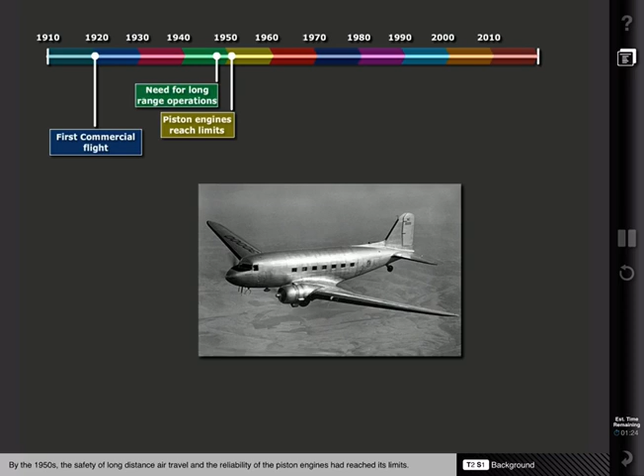By the 1950s, the safety of long-distance air travel and the reliability of piston engines had reached its limits. In 1953, regulations came out requiring commercial airlines operating twin-engine aircraft to stay within 60 minutes flying time of a suitable airport at all times. This drastically restricted where and how an airline could conduct its flight operations.

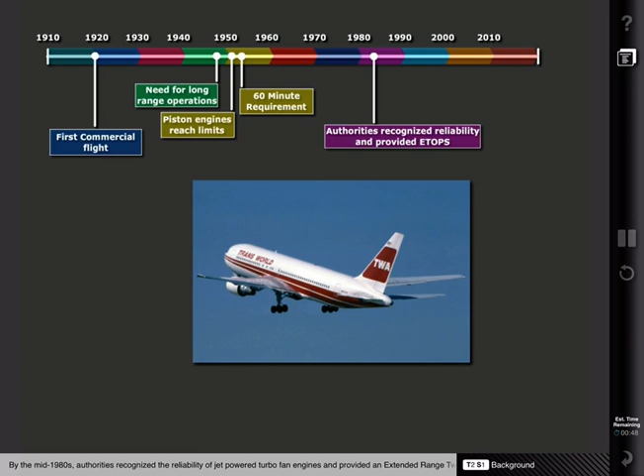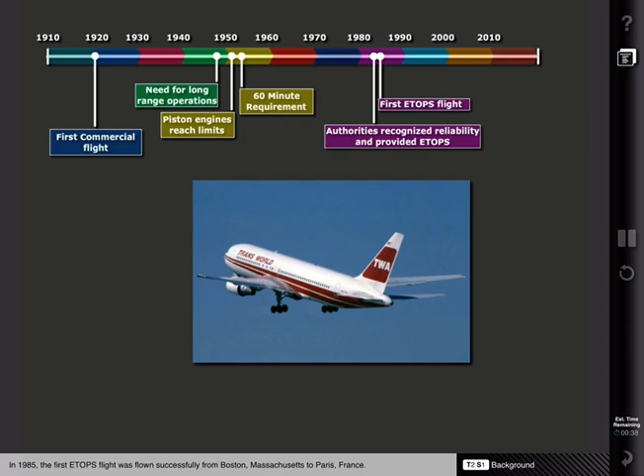By the mid-1980s, authorities recognized the reliability of jet-powered turbofan engines and provided an extended-range twin-engine operations, or ETOPS, exception to the 60-minute rule. In 1985, the first ETOPS flight was flown successfully from Boston, Massachusetts to Paris, France. Today, ETOPS stands for Extended Operations.

The ETOPS area for twin-turbine engine-powered aircraft is when the aircraft is beyond 60 minutes from an adequate airport, using one engine inoperative cruise speed under standard conditions in still air, also known as drift down.

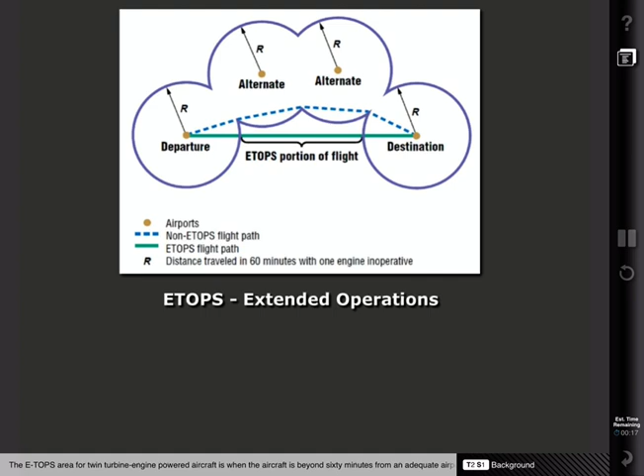The ETOPS regulations have been modified to include aircraft with more than two engines. However, for the purpose of this lesson, we will be focusing primarily on the twin-engine aircraft regulations.

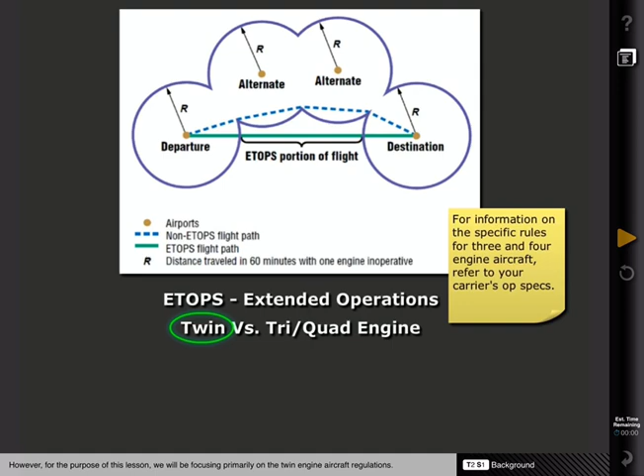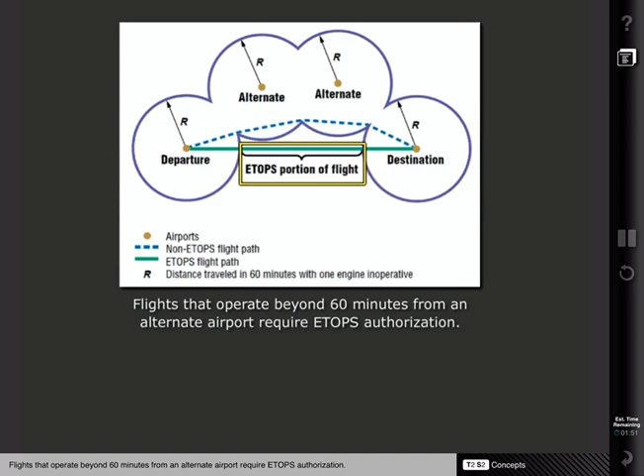Flights that operate beyond 60 minutes from an alternate airport require ETOPS authorization. To explain the concept, let's consider the following example.

Assume your airline wants to fly from A to C, New York JFK to Madrid, Spain. There is one adequate alternate airfield, B, within range, and that is Terceira Island, Lajes. The 60-minute rule is indicated by the red lines, which show the maximum range the aircraft can be from an alternate airport at any time.

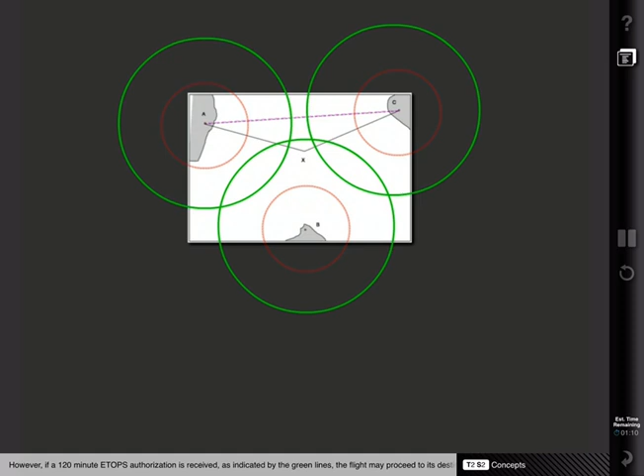As a result, the flight is not permissible under the 60-minute rule. However, if a 120-minute ETOPS authorization is received, as indicated by the green lines, the flight may proceed to its destination following the route A-X-C.

Based on the 120-minute area of operation, flight from New York to Madrid is possible with only a small deviation from the direct route as originally planned.

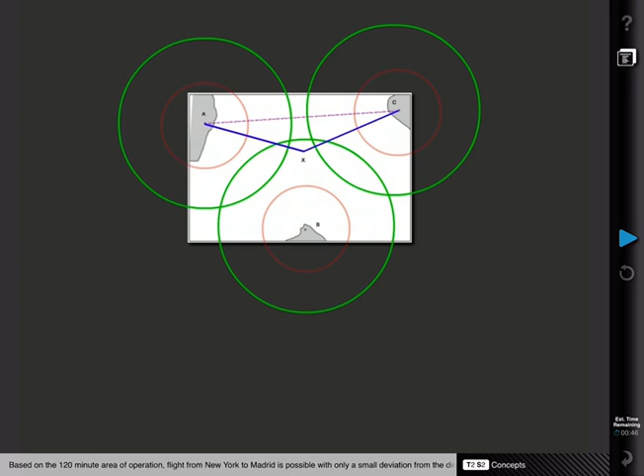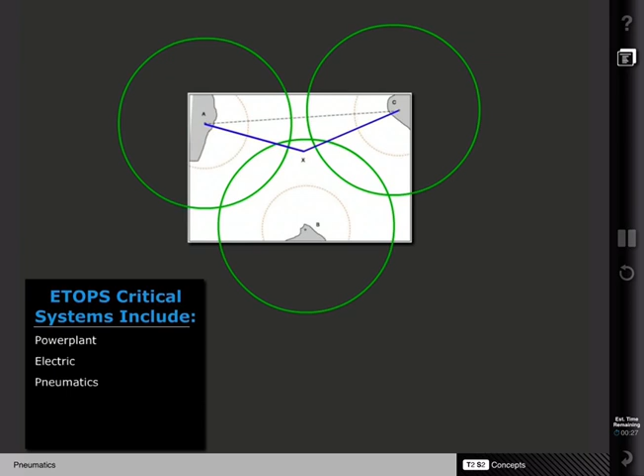Another aspect of ETOPS regulations addresses engine reliability and other critical ETOPS systems reliability. ETOPS critical systems include power plant, electric, pneumatics, air conditioning, and hydraulics.

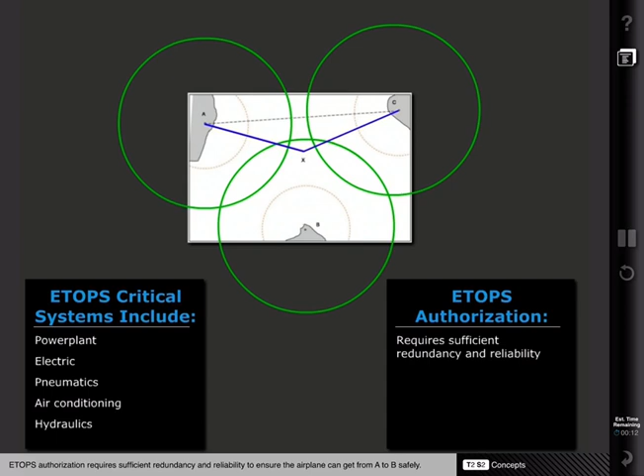ETOPS authorization requires sufficient redundancy and reliability to ensure the airplane can get from A to B safely. Additionally, operators need to demonstrate flight planning expertise and a much more rigorous maintenance program.

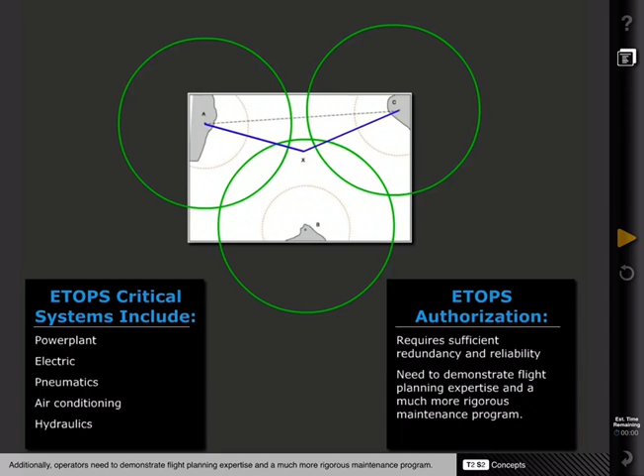Over the years, ETOPS has proven to be a safe and reliable practice that not only provides airlines efficient and flexible flight operations, but also provides the air-traveling public improved safety and reliability.

ETOPS operations allow airlines to go more places and try new routes and markets that may be cost-prohibitive with larger aircraft. It also enhances existing routes by improving overall maintenance reliability and schedule performance.

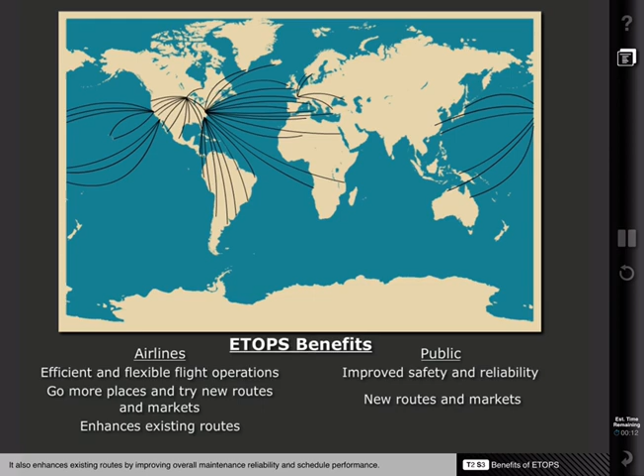While there is a cost investment to ETOPS operations, the payoffs will affect the entire operation, not just the ETOPS routes.

The U.S. Code of Federal Regulations 14 CFR Part 121 regulates ETOPS operations. This section will primarily focus on the highlights of the regulation as it impacts flight crew procedures. Refer to 14 CFR for more details regarding the regulations.

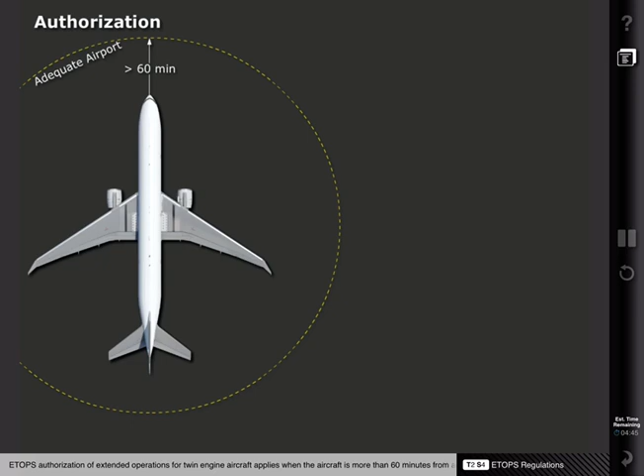ETOPS authorization of extended operations for twin-engine aircraft applies when the aircraft is more than 60 minutes from an adequate airport. For 3- and 4-engine passenger airplanes, it applies when the aircraft is more than 180 minutes from an adequate airport.

The regulations require that ETOPS diversion times cannot exceed the time limit minus 15 minutes for the aircraft's most time-limited system, which is usually cargo fire suppression.

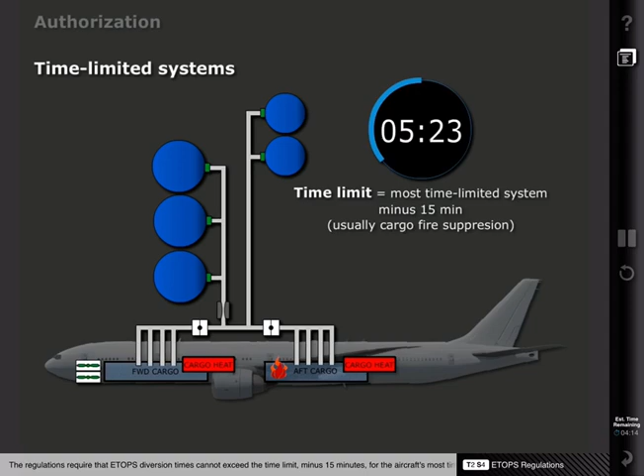The regulations require satellite communication, or SATCOM, voice communications for all extended operations beyond 180 minutes. Another form of communication must also be available in areas where SATCOM technology is unusable. Other communication systems like VHF, HF, and SATCOM or HF data link have limitations that can compromise the reliability of communications during extended operations.

To qualify as an ETOPS alternate, the airport must be classified as an ETOPS adequate airport. An ETOPS adequate airport must satisfy the following 3 conditions.

First, it is appropriate for your aircraft type. Second, it meets the stated requirements for use during a planned diversion. And third, the airport is listed in your op specs.

Once determined as adequate, in order for an airport to be classified as an ETOPS alternate, it must also meet the weather conditions which are at or above operating minimums for the time required, have firefighting and rescue equipment available for use, and be available for diversion use. More information on ETOPS alternate airports will be presented later in the lesson.

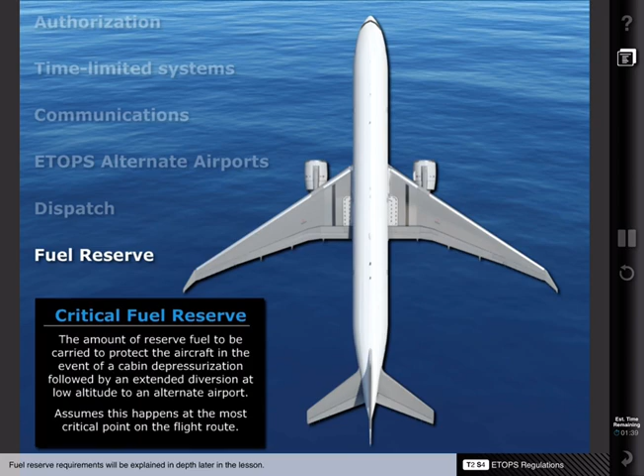A recent change requires 3- and 4-engine passenger airplanes to carry an ETOPS fuel reserve on ETOPS routes. The FAA has also implemented a non-ETOPS provision, requiring all 3- and 4-engine aircraft to carry a decompression fuel reserve whenever they fly beyond 90 minutes of an airport.

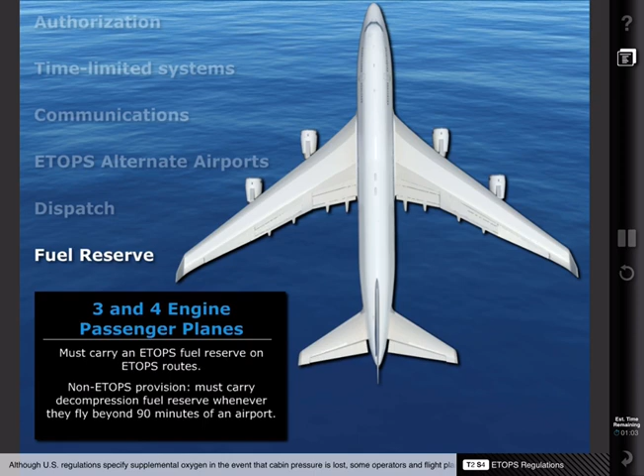Although U.S. regulations specify supplemental oxygen in the event that cabin pressure is lost, some operators and flight plan suppliers have not specified sufficient reserve fuel for the aircraft to reach an alternate airport during a low-altitude diversion.

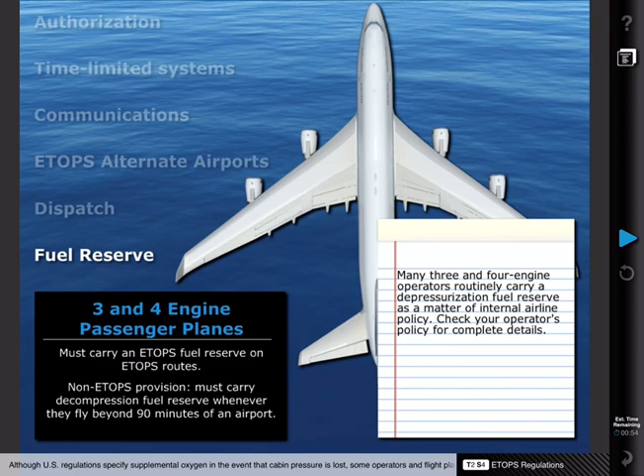The regulations require all flights on extended routes with diversion times beyond 180 minutes to prepare a passenger recovery plan. This plan ensures the well-being of passengers stranded at diversion airports and provides for their safe retrieval without undue delay. Crews need to be aware of the plan.

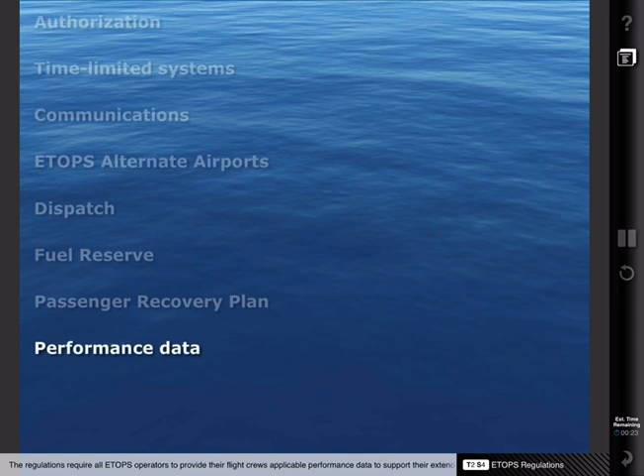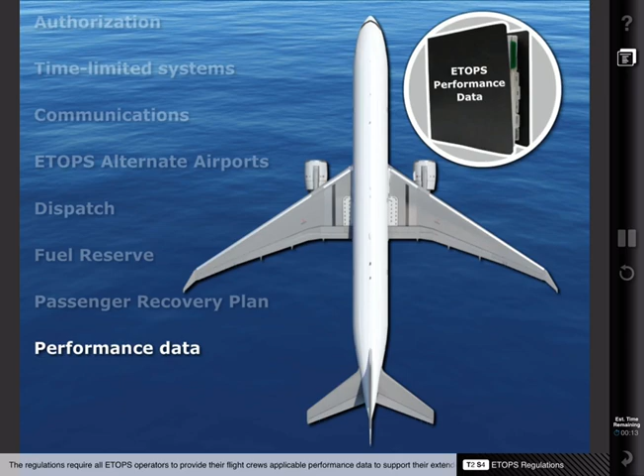The regulations require all ETOPS operators to provide their flight crews applicable performance data to support their extended operations. Finally, the regulations require that rescue and firefighting equipment be available at any airport designated as an ETOPS alternate.

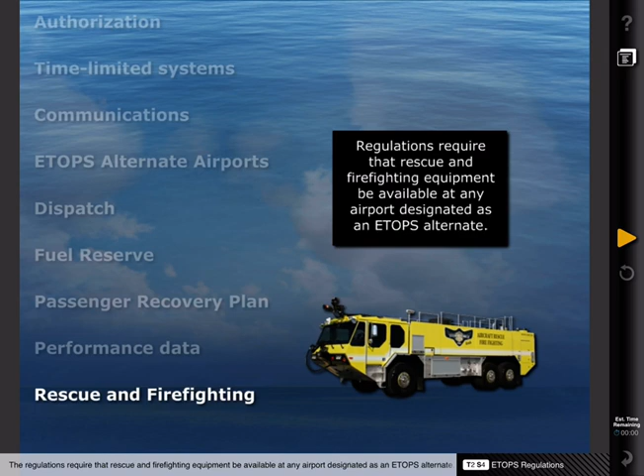It is important to understand the difference between ETOPS and extended overwater operations. While extended overwater authorization allows the aircraft to fly more than 50 nautical miles from a shoreline, ETOPS authorization is necessary to operate further than 60 minutes flying time from an adequate alternate airport.

ETOPS flights require additional maintenance inspections, additional equipment, and are subject to more limiting MEL restrictions and special operating rules not required for extended overwater flights.

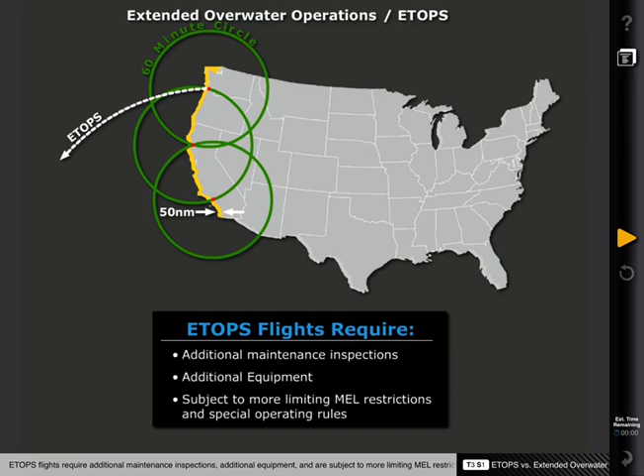ETOPS authority was established to allow twin-engine aircraft to fly between the U.S. and Europe. There are a number of ETOPS authorities available based on your operational needs. For example, there are ETOPS authorities for 75, 90, 120, 180, 240, and beyond 240 minutes. At this point, there is an ETOPS authority available to accommodate almost any city pairing in the world.

Typically, the 120-minute ETOPS authority is obtained to allow twin-engine aircraft to fly between the U.S. and Europe. However, the 120-minute ETOPS authority would not allow twin-engine aircraft to fly between the U.S. mainland and Hawaii. As a result, 180-minute ETOPS authority is required for twin-engine aircraft to reach Hawaii from the mainland.

ETOPS circles are a graphical tool provided by an operator's flight planning software that displays the areas where a twin-engine aircraft can fly under ETOPS authority. The circles are defined by assuming an airspeed of 300 knots indicated airspeed or Mach 0.80 in still air. The circles always represent a distance, and each circle is centered on an adequate airport.

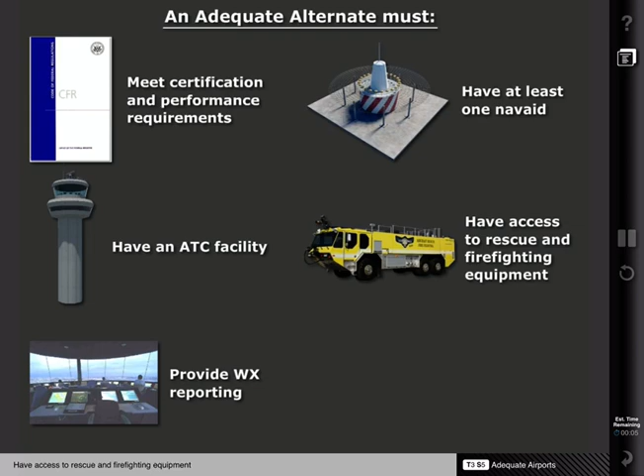Adequate airports are used to define where ETOPS airspace begins and ends. One factor that governs the decision on alternate airports is the definition of adequate alternates. An adequate alternate must meet certification and performance requirements, have an ATC facility, provide weather reporting, have at least one nav aid, have access to rescue and firefighting equipment, and conform to ETOPS weather requirements.

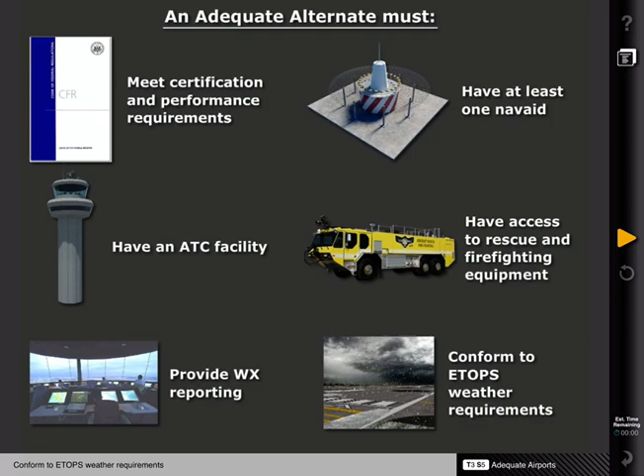The ETOPS weather requirements are: a ceiling and visibility addition is applied to the lowest minimums at the airport, not lower than Cat 1, based on the number and type of instrument approaches available at the field. Separate nav aids require independent runway surfaces that do not intersect or touch at any point along their length.

In addition, there is a time requirement for these weather conditions at an alternate. Specifically, the weather must be forecast to conform to ETOPS weather minimums from 1 hour prior to the earliest possible time the aircraft could arrive, to 1 hour after the latest time the aircraft would arrive, following a diversion from the equal time point. If a diversion is necessary, published minimums apply at the diversion airfield, not ETOPS weather minimums. ETOPS weather minimums exist only for determining the best choice for an adequate alternate in accordance with ETOPS flight planning requirements.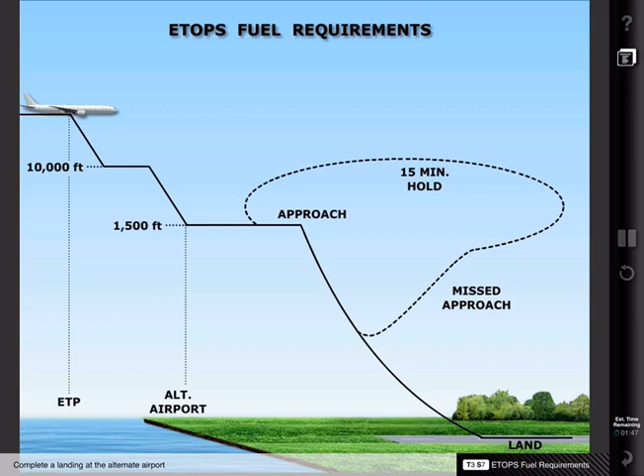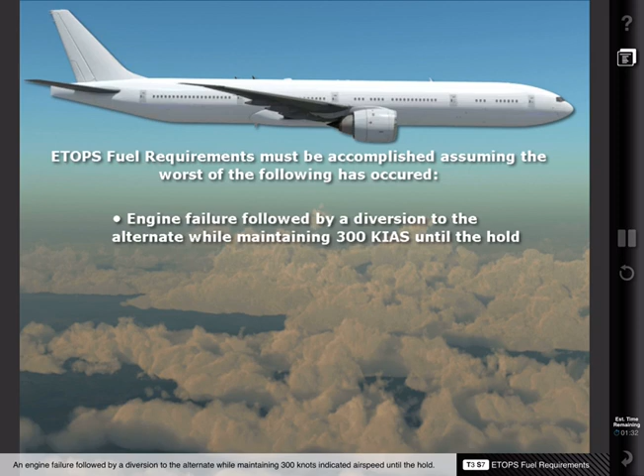This must be able to be accomplished assuming the worst of the following three possibilities has occurred at the equal time point: an engine failure, followed by a diversion to the alternate while maintaining 300 knots indicated airspeed until the hold; a depressurization of the cabin; or an engine failure and a depressurization of the cabin, again using 300 knots as the diversion airspeed. A depressurization of the cabin is typically the most detrimental of the three possibilities with regard to fuel burn.

The following situations would require additional fuel to be added to ETOPS flights. Any MEL or CDL burn penalties that apply to the aircraft, the in-service deterioration correction factor value, which is added to burn fuel automatically as a result of the cruise burn percentage listed in the computer flight plan section and entered in the CDU.

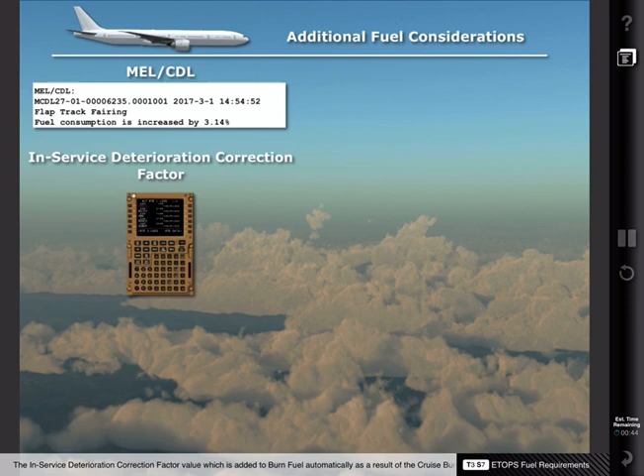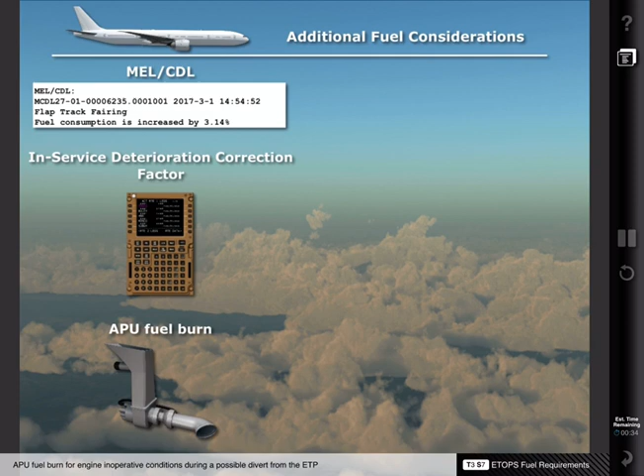APU fuel burn for engine inoperative conditions during a possible divert from the equal time point, a 5% wind forecast error, a percentage of ice accretion burn to compensate for ice buildup on the non-heated portions of the flight controls, wings, and fuselage, which is based on forecast icing condition and listed on the flight plan as full, 2/3, 1/3, or off. Or your operator may impose an ETP fuel pad that can be anywhere between 300 to 1,000 pounds, added to compensate for any unforeseen contingencies.

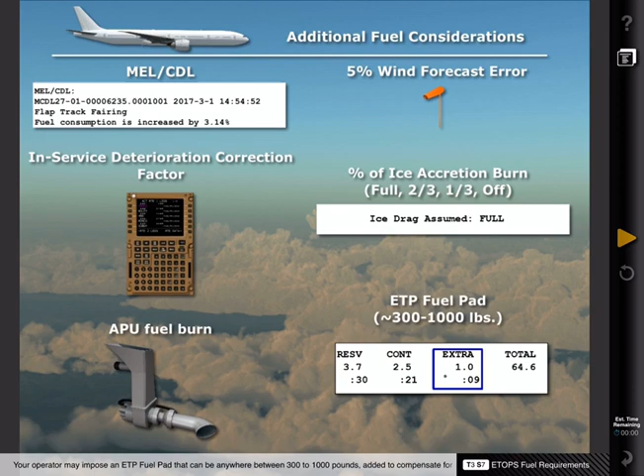Continuing with the Seattle to Maui flight, this topic will take you through a typical preparation for an ETOPS flight, from pre-flight planning to procedures prior to entering ETOPS airspace. Not all steps will be included here, just those unique to ETOPS requirements. Refer to your operator's manual for specific information on all phases of flight.

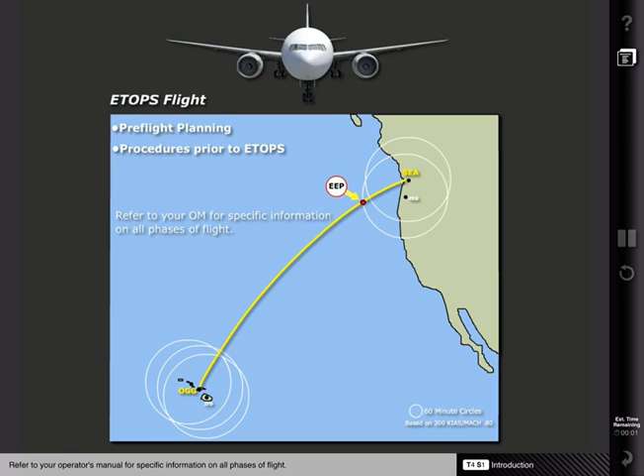Most likely, the planning phase will start with a dispatch briefing. A dispatch briefing is required any time a flight will be operated internationally with a planned flight time greater than 5 hours. While a flight to Hawaii will begin and end on U.S. soil, you will need to keep in mind that an international flight is defined as one that has a point of origin or destination outside the 48 contiguous United States.

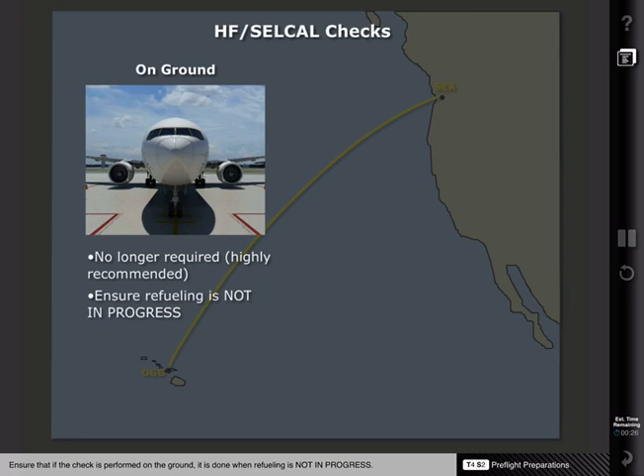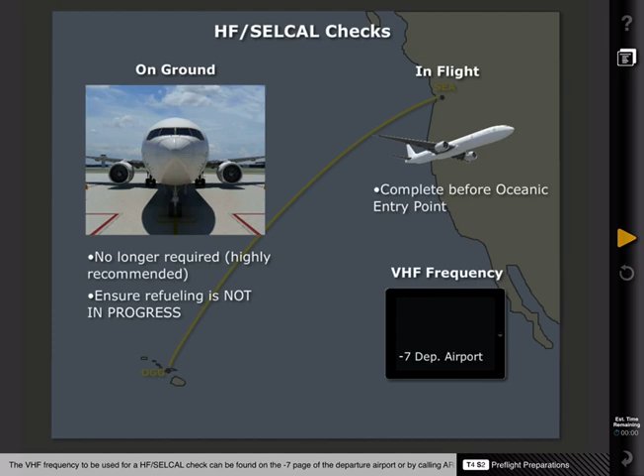An international flight folder contains the paperwork, such as the flight release, flight plan, a weather package, and a navigation chart. The captain is responsible for verifying the accuracy of the flight plan. The flight plan is used to record position report information, re-release data, meteorological information, and other pertinent flight data. Any discrepancies must be resolved with dispatch prior to departure.

When verifying the flight plan, the captain must ensure the computer flight plan routing and requested altitudes agree with the ICAO flight plan routing on the release, and ensure the computer flight plan coordinates agree with the actual coordinates from your high-low altitude en route charts, the track message, or other approved navigation charts.

Additionally, review the Etops summary section on the flight plan. Compare the Etops fuel summary with the ETP fuel on the master flight plan. Make sure fuel estimates over the ETPs are greater than the fuel required to divert at each ETP.

Also review the list of adequate airports. If there is a concern with one of the alternates listed, contact dispatch for further guidance.

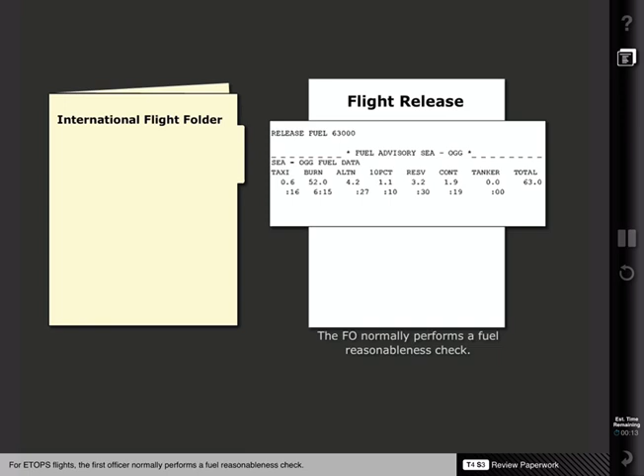For Etops flights, the first officer normally performs a fuel reasonableness check. Most often, the operational standard permits no more than a 2% error tolerance.

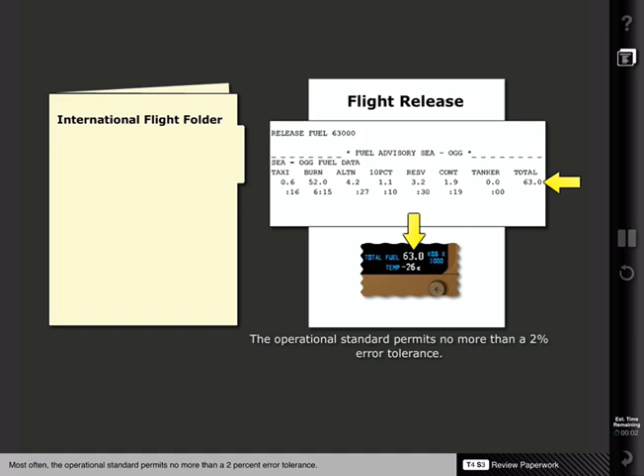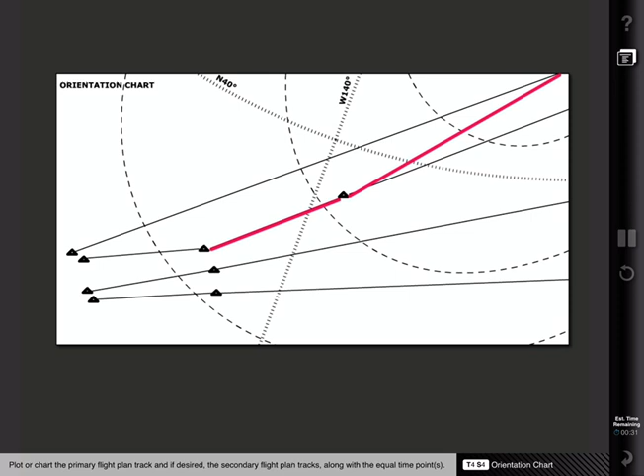While the captain is verifying the flight paperwork, the first officer will be preparing the Etops orientation chart. Plot or chart the primary flight plan track, and if desired, the secondary flight plan tracks, along with the equal time point or points. When this is done, the captain must check the waypoint coordinates from the Etops orientation chart, while the first officer verifies them against the master flight plan.

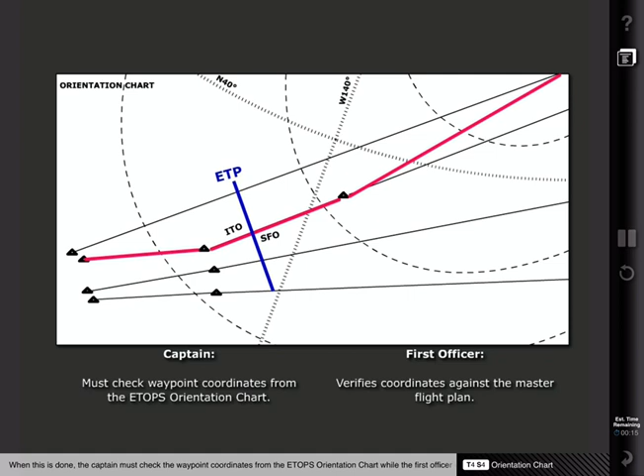The use of the Etops orientation chart is mandatory. However, if an orientation chart is not available, a high-low en route chart may be used instead.

As with any other flight, the pre-flight tasks include logbook inspection. Ensure that a line check has been accomplished and that any write-ups have been addressed. For Etops operations, there are additional requirements concerning the logbook review, which include the Etops pre-departure check, or PDC, and oil watch boxes.

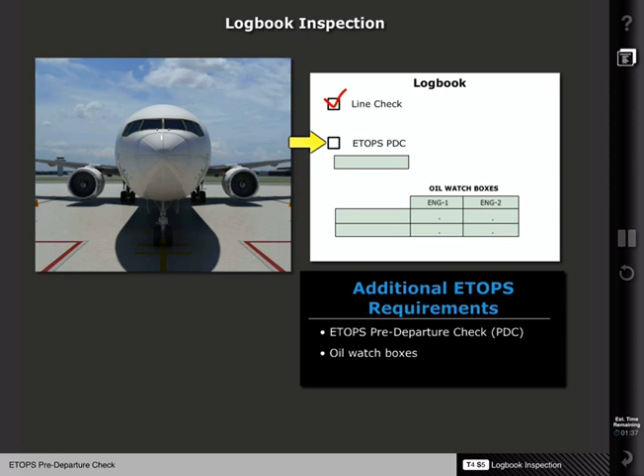An Etops pre-departure check is required for all Etops operations. The pre-departure check includes a review of the critical Etops systems, and it must be completed within 4 hours preceding pushback from the gate.

If pushback cannot be accomplished within the 4-hour limit, an extension may be granted, provided the delay was not due to an Etops significant system maintenance issue.

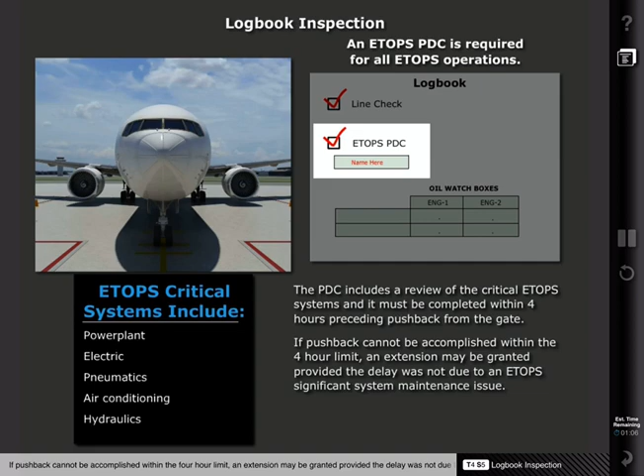If one of the packs fail while sitting at the gate, and it takes over 4 hours from the time the original pre-departure check was completed to fix it, another PDC would need to be completed and the logbook signed off accordingly.

Back to the logbook, the oil watch boxes must be signed off by 2 different mechanics. If an Etops verification flight is necessary, details will be included in the remarks section of the logbook.

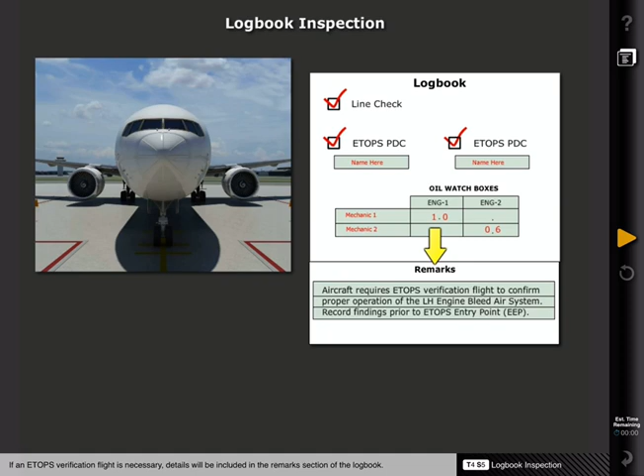Once airborne, there are specific Etops required steps that need to be completed. Much of the planned route will be conducted in Class 2 airspace. Before leaving Class 1 airspace, a navigation accuracy check must be accomplished.

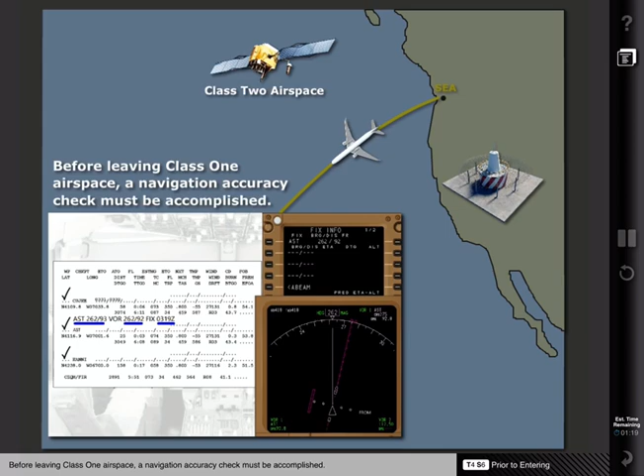A requirement of oceanic airspace not driven by Etops rules is to be at the filed altitude at your oceanic entry point. Therefore, ATC must be notified if unable to reach cruise altitude by the route entry point.

3 items must be checked and verified with your dispatcher prior to entering Etops airspace: weather at the alternate airports, fuel status of the aircraft, and maintenance status of the aircraft.

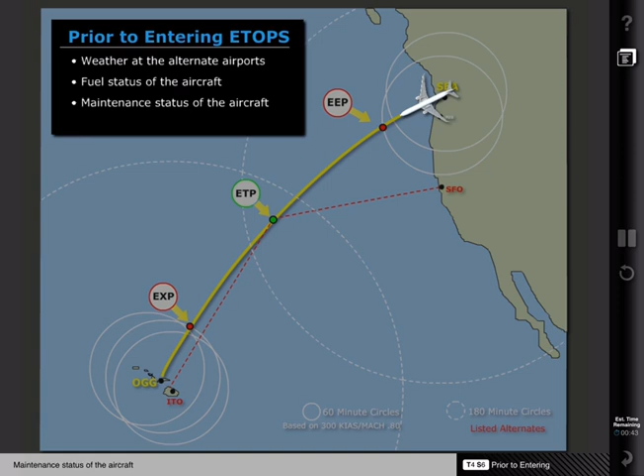No later than 30 minutes prior to reaching the Etops entry point, dispatch will send a message verifying the weather at the alternates and will ask the captain to verify that it is legal for the flight to continue into Etops airspace.

If the maintenance and fuel status of the aircraft are satisfactory, the captain is expected to reply with a "Captain concurs EOK" message. The flight cannot legally continue into Etops airspace until the message is received by dispatch.

When the Etops entry point is reached, a position report should be sent to dispatch identifying the name of the position. Be aware that position reports made directly to the ATC facilities may not be automatically forwarded to your operator. Position reports made to ARINC facilities are forwarded to both ATC and the operating airline.

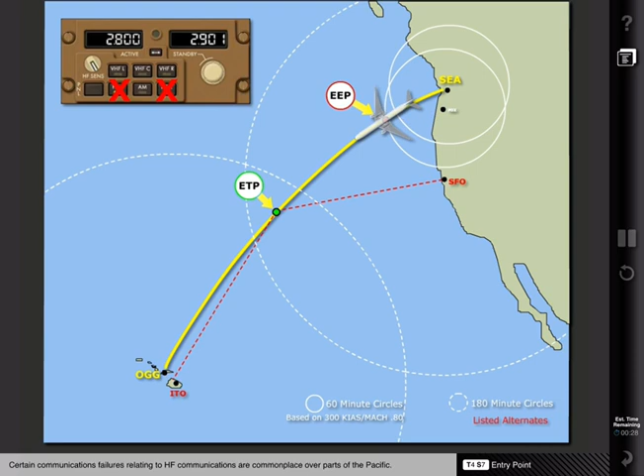Certain communications failures relating to HF communications are commonplace over parts of the Pacific. An HF data link failure does not necessarily mean you will need to divert. Note that HF data link is not required for Etops operations. However, HF voice is required.

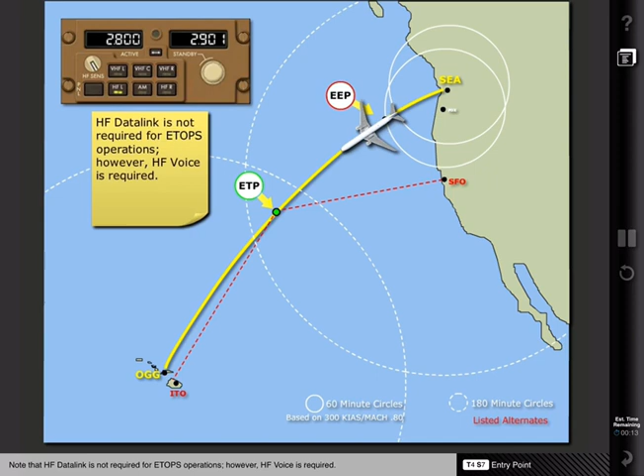For the remainder of the flight, there are no unique Etops procedures to follow, and the flight will proceed as any normal flight operation.

In this topic, we will cover 2 scenarios: less fuel at the equal time point, and a loss of an engine at the equal time point.

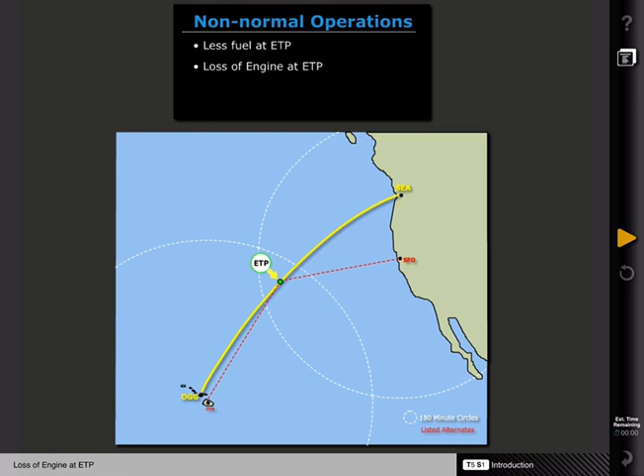Consider this fuel scenario. Your estimated fuel over the equal time point is less than that listed within the 180-minute Etops summary on the flight plan. Note, this is the value required for dispatch.

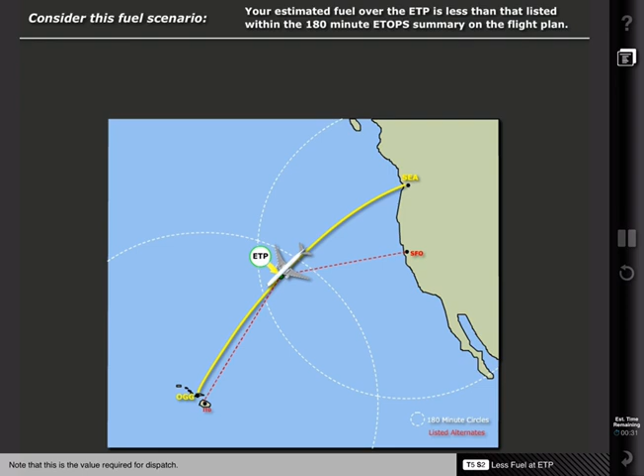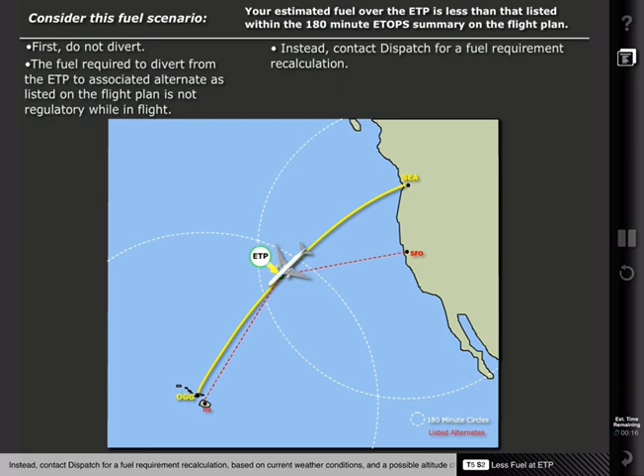First, do not divert. The fuel required to divert from the equal time point to associated alternate as listed on the flight plan is not regulatory while in flight. Instead, contact dispatch for a fuel requirement recalculation based on current weather conditions and a possible altitude change. Dispatch will be able to provide a more detailed analysis of fuel requirements based on the specific situation.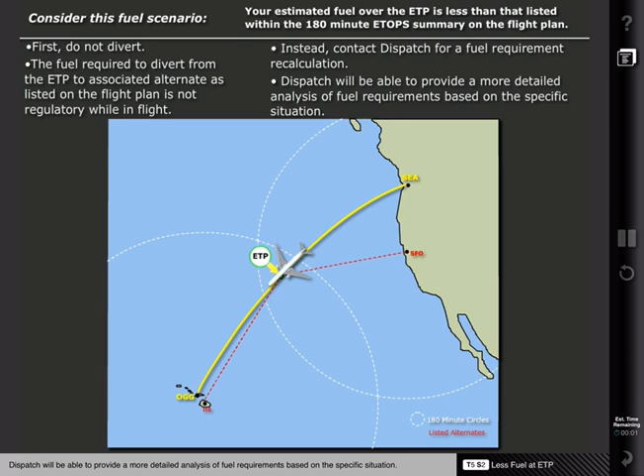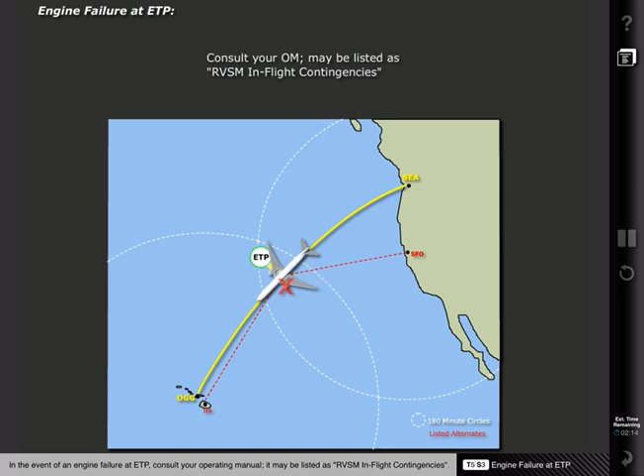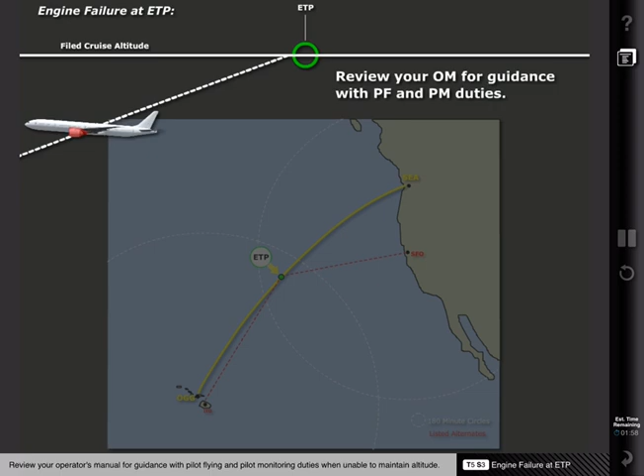In the event of an engine failure at the equal time point, consult your operating manual. It may be listed as RVSM in-flight contingencies. Most likely, the aircraft will not be able to maintain altitude in this event. Review your operator's manual for guidance with pilot flying and pilot monitoring duties when unable to maintain altitude. During an engine-out divert while unable to maintain altitude, there are some unique ETOPS decision-making scenarios regarding speed that are worth addressing.

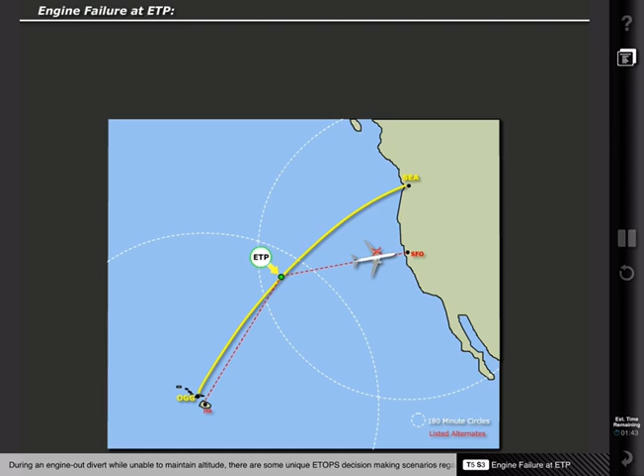The FMC engine-out cruise speed is equivalent to L/D max and is typically an indicated airspeed in the low 200 knots. This function favors maintaining a high altitude over a faster speed. It also provides the greatest fuel economy.

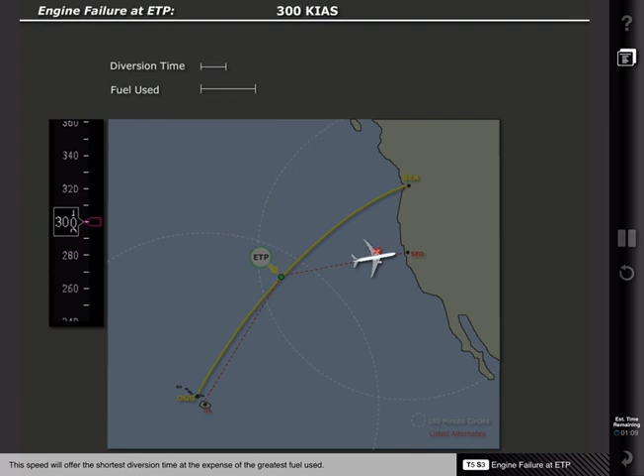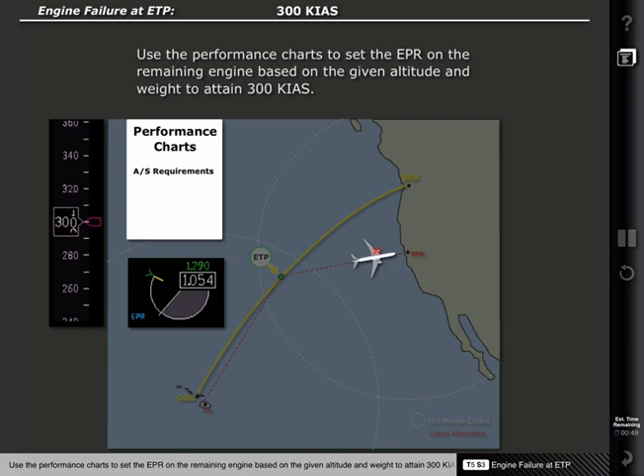The 300 knots indicated airspeed is normally used by dispatch for fuel planning purposes. This speed will offer the shortest diversion time at the expense of the greatest fuel used. Consult your aircraft's performance charts for specific airspeed requirements. Use the performance charts to set the EPR on the remaining engine based on the given altitude and weight to attain 300 knots indicated airspeed. Also, use the performance charts to approximate fuel flow and equivalent true airspeed.

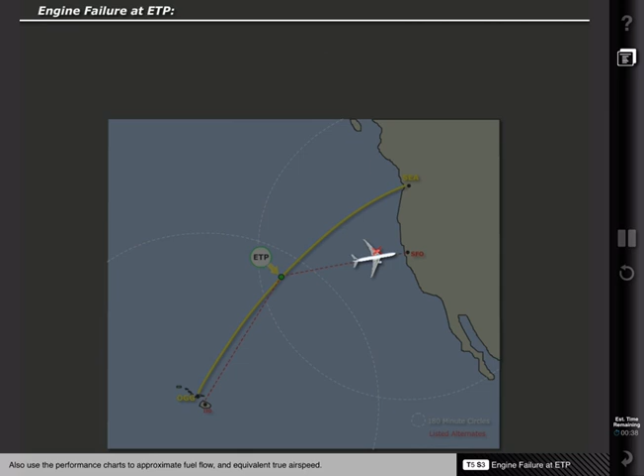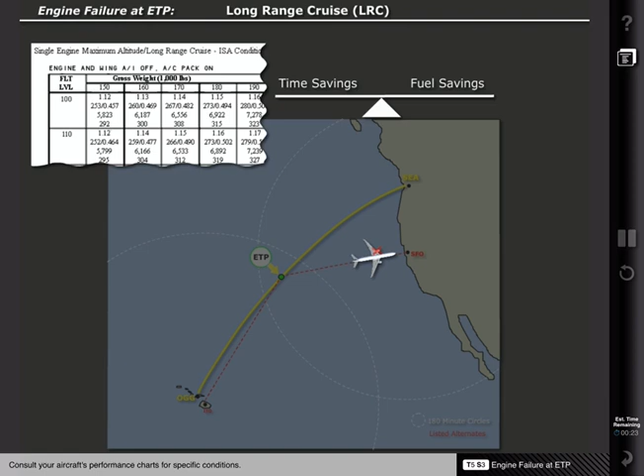Long-range cruise, or LRC, speed provides a good compromise between time savings and fuel savings if time is a factor during an unplanned divert. Consult your aircraft's performance charts for specific conditions. It also offers guidance for the EPR setting on the remaining engine, given the altitude and weight of the aircraft. Also use these charts for an approximation of indicated airspeed or Mach value, fuel flow, and true airspeed.

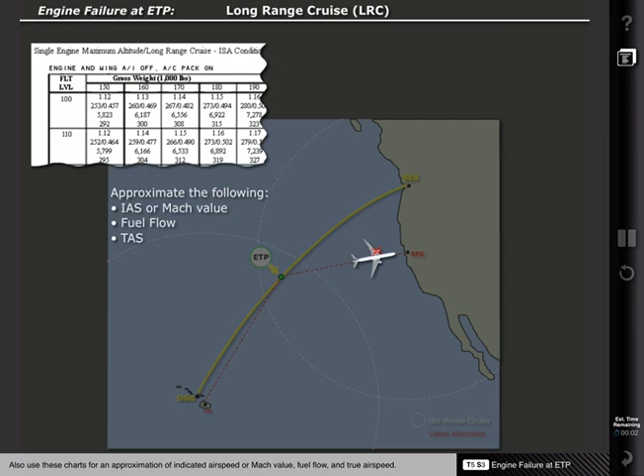We will now cover an example of an eastbound transatlantic flight. It will focus on normal pre-flight and en route procedures specific to ETOPS operation. Your pre-flight duties will start with reviewing the International Flight Folder, which includes the flight release, the flight plan, a weather package that will include NOTAMs and an upper air and surface weather depiction, an orientation chart, and a track message. Review the flight release for accuracy and check for fuel reasonableness.

Since the flight plan contains a re-release section, review the flight plan re-release fuel data comparison. Verify the computer flight plan routing and requested altitudes agree with the ICAO flight plan routing on the release. Check destination alternates for reasonableness. Pay close attention to those items that can affect ETOPS status, RVSM status, or communication capability. If any item disqualifies the aircraft from ETOPS or RVSM operations, or if it requires alternate routing to stay within VHF radio coverage, contact dispatch to ensure the flight plan reflects the fuel requirements for the new routing.

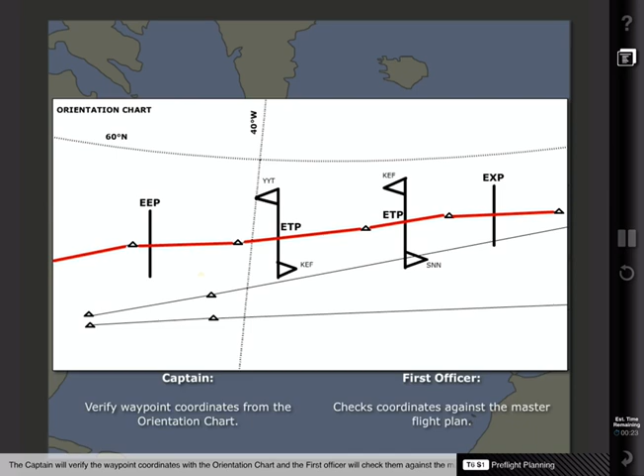Typically, the first officer will prepare the orientation chart by plotting the primary flight plan track, ETOPS entry points, equal time points, and exit points on the route. Unlike the Hawaii example, transatlantic routes typically include more than one equal time point. The captain will verify the waypoint coordinates with the orientation chart, and the first officer will check them against the master flight plan. The orientation chart is mandatory, but if one is not available, it is acceptable to use the high-low altitude chart. Because this flight will be longer than 5 hours, the captain will need to conduct a dispatch briefing with the flight dispatcher.

Once on the aircraft, review the logbooks. Ensure the line checks are complete and valid. Check that the ETOPS pre-departure checkbox is checked and signed. Verify the oil watch boxes are signed off by 2 different mechanics, and ensure the ETOPS verification flight procedures are complete and signed off.

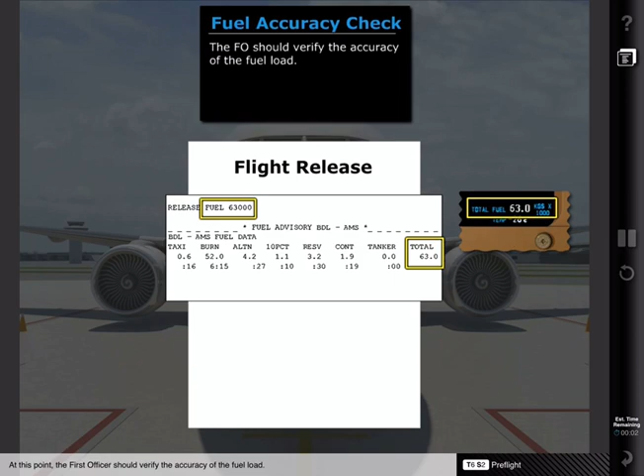At this point, the first officer should verify the accuracy of the fuel load. Normal procedures required for any international flight should be followed. Prior to entering ETOPS airspace, check and verify with dispatch weather at the alternate airports, fuel status of the aircraft, and maintenance status of the aircraft.

Remember, in order for the flight to remain legal under ETOPS authority, the captain must report back to dispatch, "Captain concurs EOK," 30 minutes prior to reaching the ETOPS entry point. Once in ETOPS airspace, complete position reports and ensure to remain in HF voice communication.

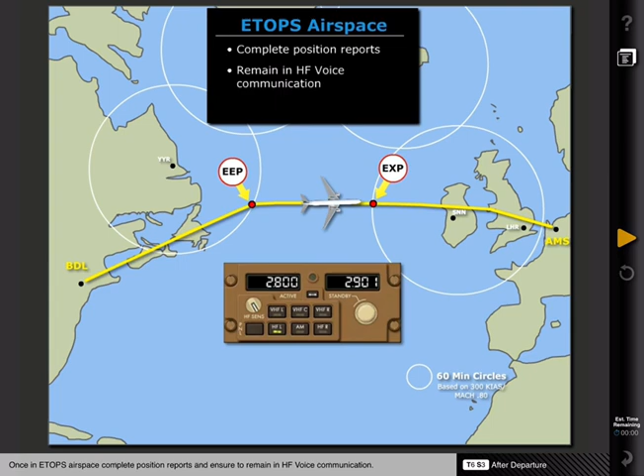The westbound procedures are similar to that of the eastbound example shown earlier, with a few differences regarding random routes worth mentioning. Similar to eastbound flights, for westbound routes, the first officer will prepare the orientation chart based on the flight plan. If a westbound random route is planned, it will not conform to the published tracks issued by Shanwick Oceanic.

Random routes require more northerly routes of flight and are normally flown to avoid strong headwinds and turbulence. A unique characteristic of this route is that the aircraft will never be more than 60 minutes away from an adequate alternate airport. The flight is planned so it can be completed without actually entering ETOPS airspace. In this case, the dispatcher has a few options. The flight can be released either as an ETOPS flight or a non-ETOPS flight.

Let's assume that dispatch prepared the flight plan using 180-minute ETOPS authorization. There will not be an ETOPS entry or exit point on the plan. However, there will be equal time points listed between the alternates. The advantage of this is that ETOPS airspace is available to use if necessary due to weather rerouting or an in-flight contingency.

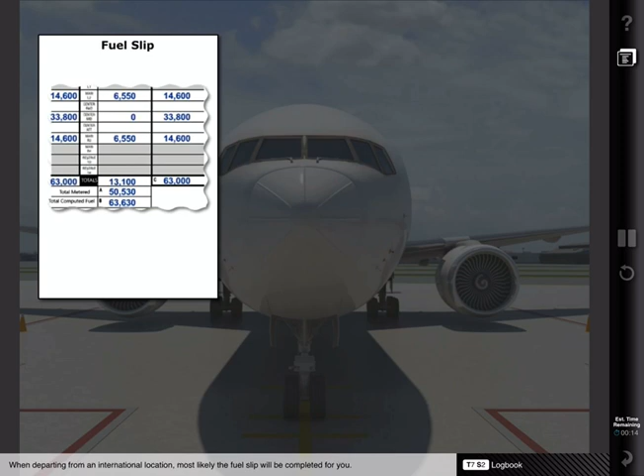Once on the aircraft, review the logbook as usual. Because this flight is scheduled as an ETOPS flight, ensure the ETOPS pre-departure check was completed. Even if the flight is not flown as an ETOPS flight, maintenance will always assume that all departures to the United States are ETOPS flights and will perform an ETOPS PDC. When departing from an international location, most likely the fuel slip will be completed for you. However, it is still a good idea to review it to ensure accuracy within a 2% error tolerance.

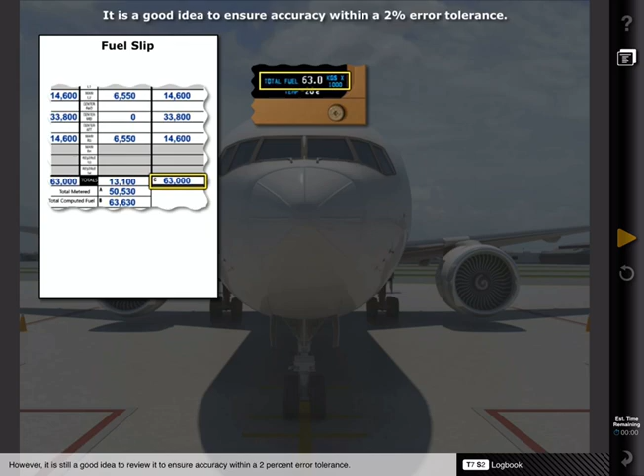Blue Spruce routes are used when the aircraft does not have HF capability. Therefore, it will be routed to ensure VHF capability at or above flight level 300 over the entire span of the transatlantic flight. A similar route will be necessary if an MEL item prevents the aircraft from using ETOPS authority.

SATCOM is an alternative to an HF phone patch. Unfortunately, there are areas in the North Atlantic where SATCOM signals are poor, particularly westbound areas between Greenland and Iceland. Over the years, pilots and dispatchers have observed areas between Greenland and Iceland where incoming SATCOM calls are of poor quality, but outgoing calls from the aircraft are usually of better quality. Therefore, it is recommended that if an incoming call is of poor quality, consider hanging up and initiating a call back to dispatch from the flight deck.

Following a landing at an unplanned destination, you will need to know if an ETOPS pre-departure check is needed prior to takeoff and re-entering ETOPS airspace. Any diversion due to a mechanical issue requires that a PDC be completed prior to re-entering ETOPS airspace. Note, if the next flight segment will not enter ETOPS airspace, a pre-departure check is not needed. If the unplanned diversion was not due to a mechanical issue, consult your operator's manual for further guidance on flight continuation after diversion due to a non-mechanical procedure. This concludes the ETOPS lesson.